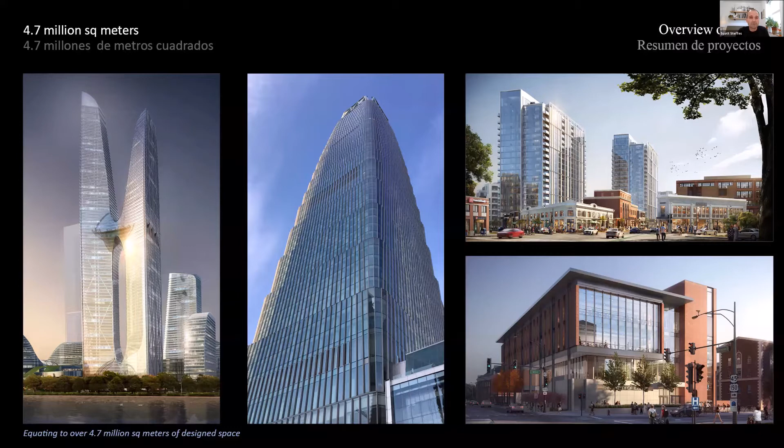And now today's presentation: Los bajos de los altos, the lowest of the highest. Today we're going to talk about the lowest of the highest. So what is the lowest of the highest? In regards to a building, it refers to the spaces typically at the base of the building that people and pedestrians occupy and view. One of the first things we can do when considering the design of the lower levels is to assess the ground plane.

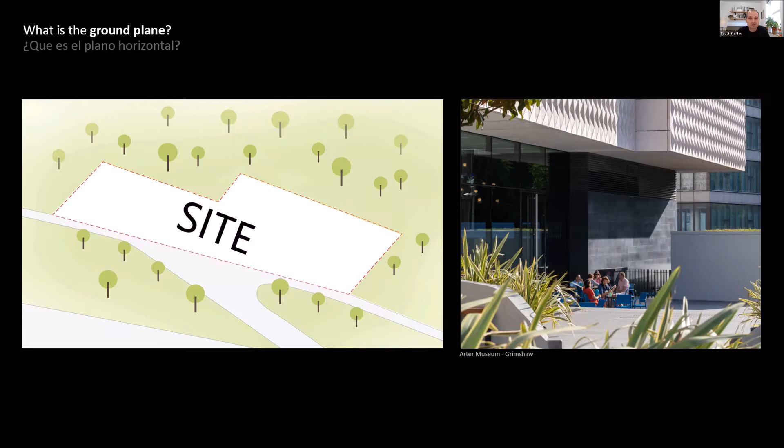So first, let's define the ground plane. The ground plane is considered the horizontal surface at the base of the project. This is sometimes referred to as site grade or the ground level. We will also include in this discussion how people view and interact with the spaces associated with the ground plane. This includes things like the shape of the building, the materials used, and the spaces created by that building.

Why is the ground plane important? Two reasons. Number one, the ground plane is where the majority of people will experience the building. It's where most people enter the building and the spaces that pedestrians walk next to.

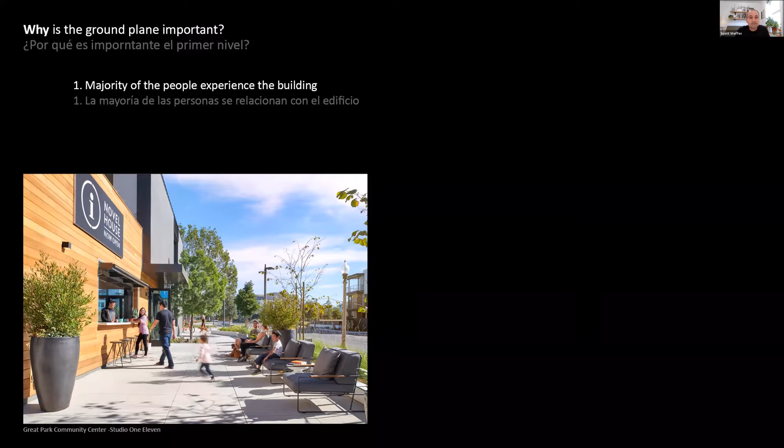Number two, the ground plane typically provides the quickest and easiest access for people, vehicles, and things. For this reason, the following programs are ideally located on the ground plane: entrance lobbies, drop-off and pickup, bars and restaurants, shopping and retail, parking, and deliveries, garbage, and building services. All of these things want to be at the base of the building, and they're all competing for that space.

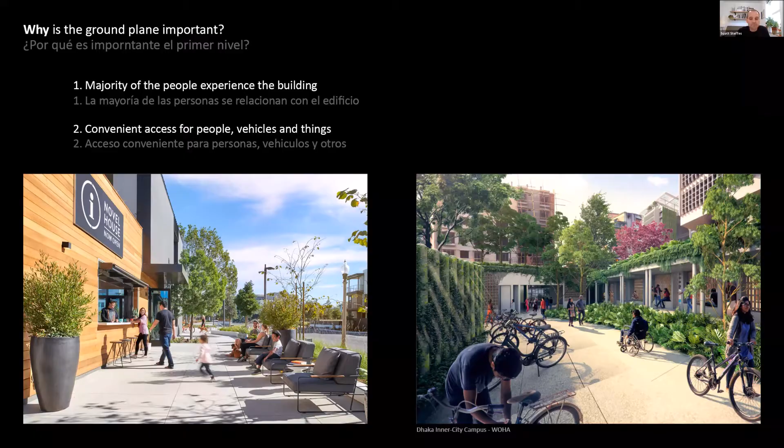So what do we need to think about when designing the ground plane? Here are 5 strategies that I've used: active, non-active, natural variation, simulated, and minimal.

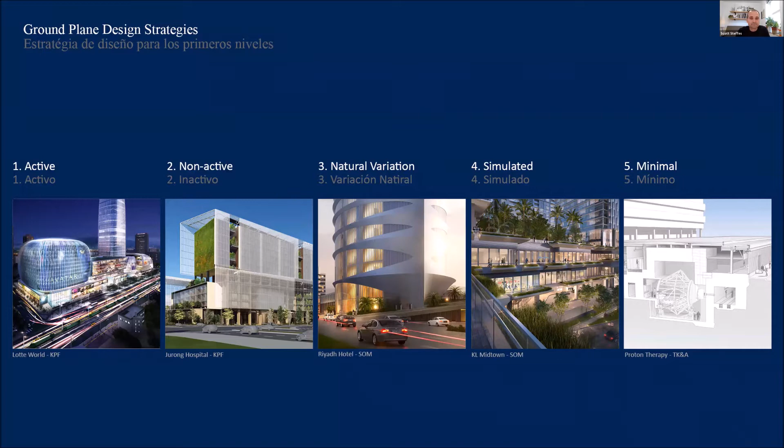We'll go through each of these in more detail now. In urban environments, active ground planes are often desirable as they provide convenience and comfort to the users. For an active ground plane to be successful, it should feel inviting to the pedestrian and allow for easy views and movement throughout.

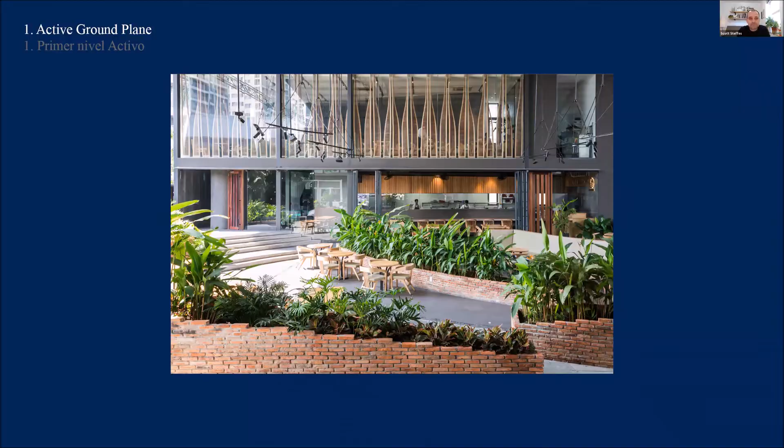So how do we make an active ground plane? Here are 5 techniques that I use. The first technique is rather obvious: if you can provide an active program that has a lot of active people, then you'll have an active ground plane. For example, programs like restaurants, bars, shopping, exercising, and performance spaces all create a more active ground plane, and should ideally be placed at the base of the building.

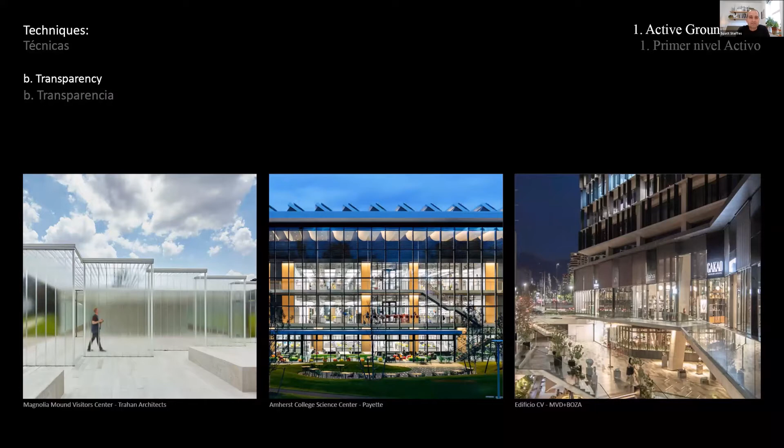The second active technique is transparency. This helps people see the active programs and also provides a sense of depth within your project.

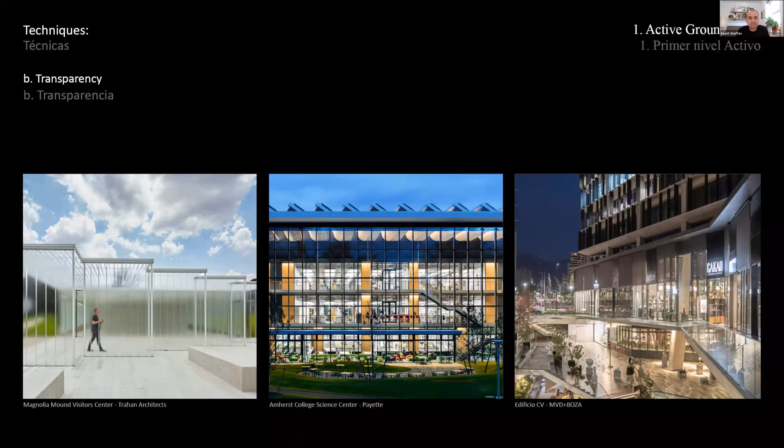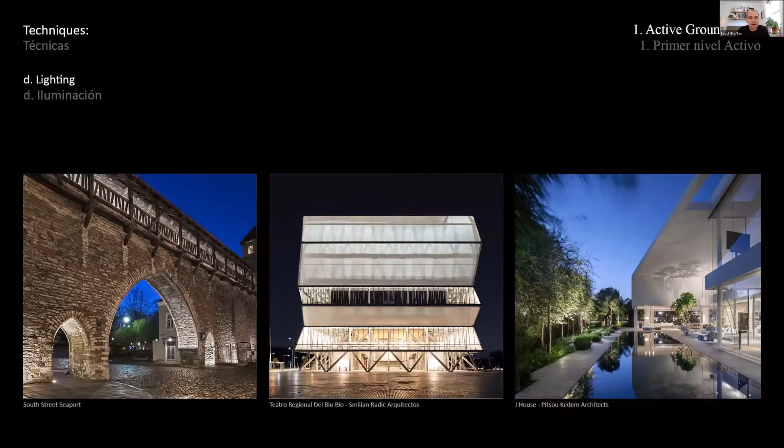The fourth technique to activate the ground plane is to utilize specialty lighting. Creative uses of light can be an easy and effective way to provide variation and manipulation of conditions, helping them feel more dramatic. A word of caution though: be thoughtful and minimal when possible with lighting, as too much light or color variation can be distracting.

The fifth technique is to utilize movement to create a sense of activity. Many things can create movement — they don't have to physically move, they can be stationary. The shape of the building itself could simulate movement.

Actual elements of the building can physically move — for example, operable shades or flickering pieces of metal. All these things can create a sense of motion. Utilizing nature can also create harmonious movement, such as the movement of trees and plants in the wind, and natural or man-made movement of water.

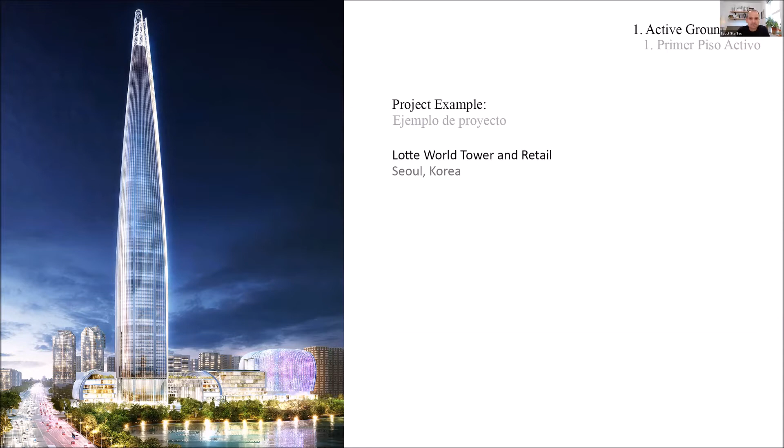Now I'm going to go through a project example that utilizes these techniques to provide an active ground plane. This is a project I worked on while at KPF. Our team had already won a competition to design an iconic 555-meter tower in this specific location. We then got asked to look at creating an active mall next to that tower, and I'll walk through how we approached the design process of that space.

To start, we looked at the ground plane. It was a flat site with an iconic tower already centrally located on the west side. The roads on the north and west were extremely busy with vehicle traffic — there were 8 lanes of traffic and thousands of people traveled on these roads each day. A large lake existed on the south side.

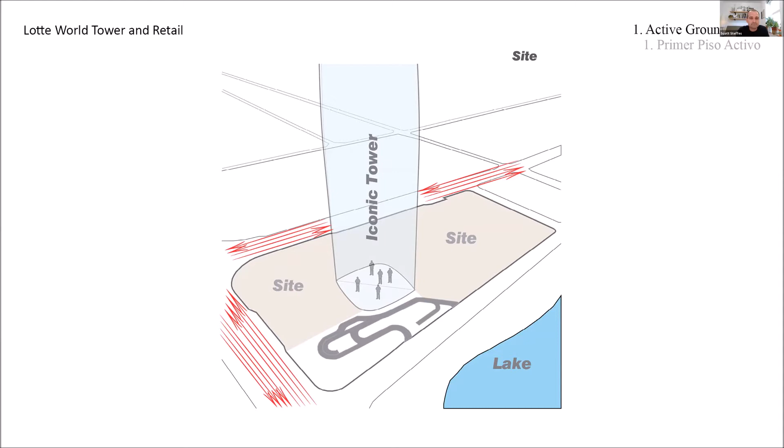Understanding that thousands of people would enter and exit the tower each day, we created a comfortable plaza that protected them from the busy traffic, by wrapping the tower with active program like restaurants, bars, and boutique shopping.

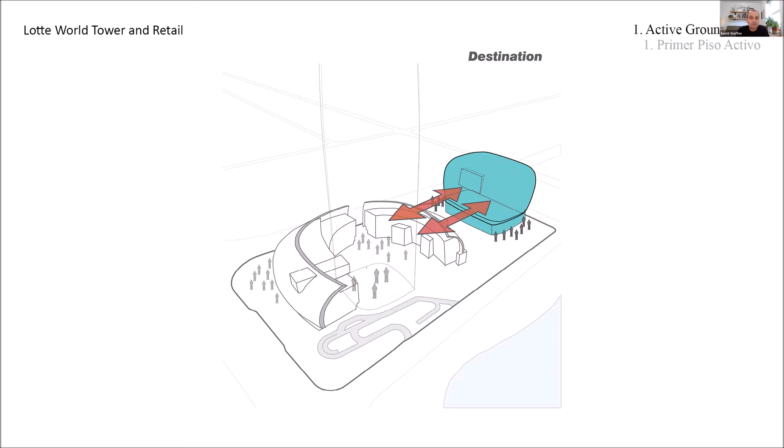Our client also wanted a large movie complex, so we utilized it as a destination opposite the tower on the far end of the site. We then infilled the space with traditional retail spaces that thrive on internal circulation. A lot of retail malls like this like to be internal, so we created functional paths through the building that would connect the two programs.

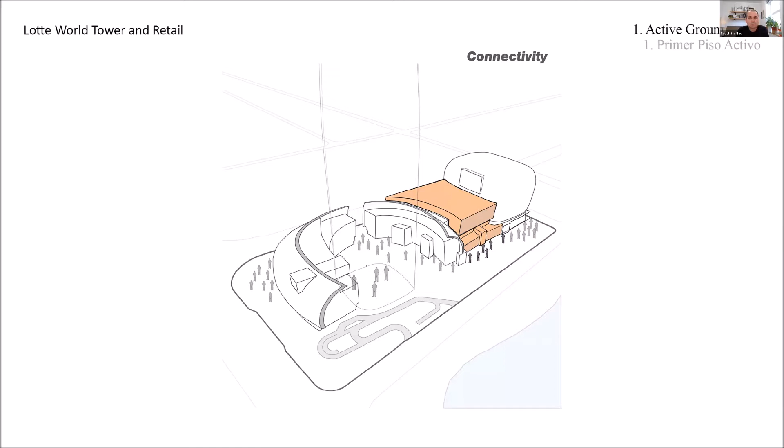I want to take a moment to look at some of the techniques and details that were developed based on these site conditions. Active programs like bars, restaurants, and specialty shopping created a dynamic space directly adjacent to the tower. We utilized transparent walls with shading devices to create depth within the building.

We provided large sculptures to help create a sense of scale. It was a big space with a tall tower next to it, so we put trees and other art that was large in its own right, but small relative to the other things, helping people feel more at scale. Lush trees and vegetation provided ample shade and natural movement throughout the plaza.

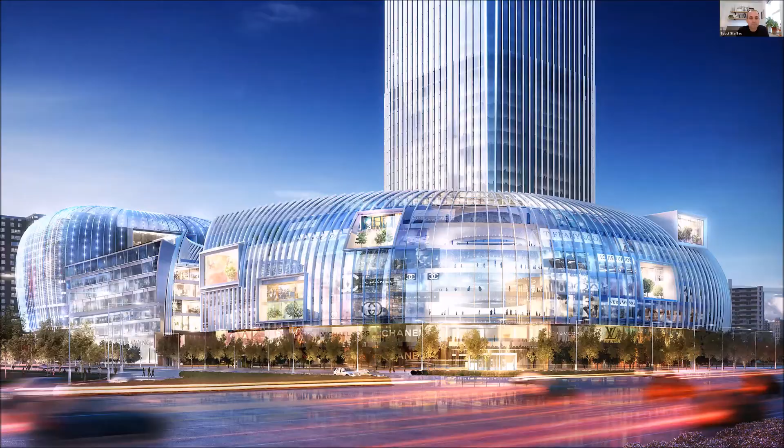Now, the north and the west sides of the building did not have as much pedestrian traffic. This project was in Seoul, Korea, and was accessed via a large train system directly to the tower. So most people would come to the site via the train and get out within the plaza. On the north side and the west side, there weren't many pedestrians, but there were a lot of cars.

So we increased the scale of architectural features to relate to the experience of the people in the vehicles instead of people on the sidewalks.

Large gathering spaces on the interior, like performance venues and circulation space, were strategically placed throughout the building. These active spaces were expressed on the exterior as transparent nodes.

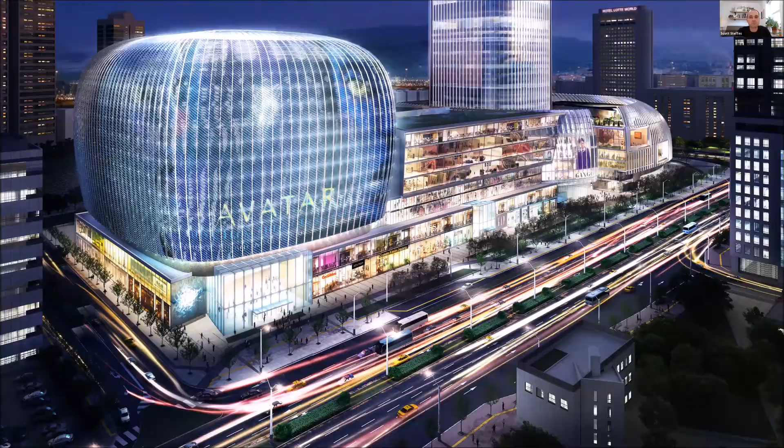Specialty lighting and screening elements were utilized to brand the building and to create a dynamic facade where other non-active facades would have been. For example, the theater space needed to have opaque exteriors.

Here we provided interactive lights that showcased the current movies. Therefore, it would change daily, throughout the day sometimes. Other retail locations incorporated signage and branding to indicate the program.

Transparent glass was once again used at entrances and gathering spaces to indicate communal spaces.

And now Javier will summarize in Spanish what the active ground plane method is. Yeah, thanks, Scott.

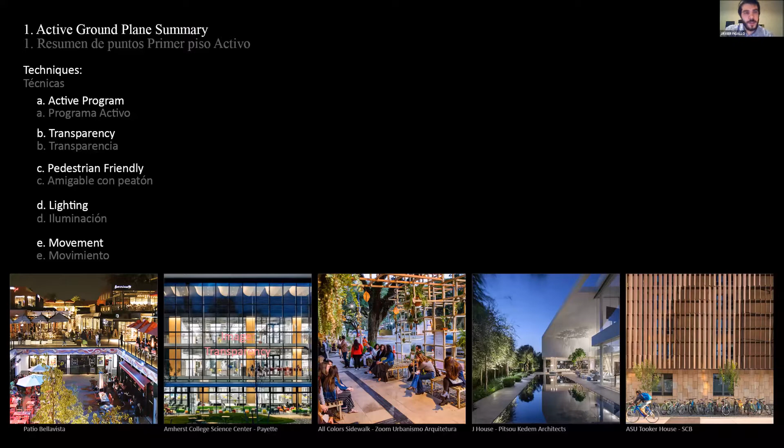End of intervention. Now you can continue, Scott. Okay, thanks, Javier.

Now we'll talk about the second ground plane method that I like to use for addressing the ground plane. This is the non-active ground plane, characterized by opaque, nondescript walls, visually unappealing spaces, and programs that do not facilitate active use by people.

In an urban environment, this is usually a bad thing and should be avoided because they can make spaces feel uncomfortable, intimidating, or undesirable. In non-urban spaces, these can be used quite effectively, and can also be effectively used in urban spaces, but in general, we like to have active spaces.

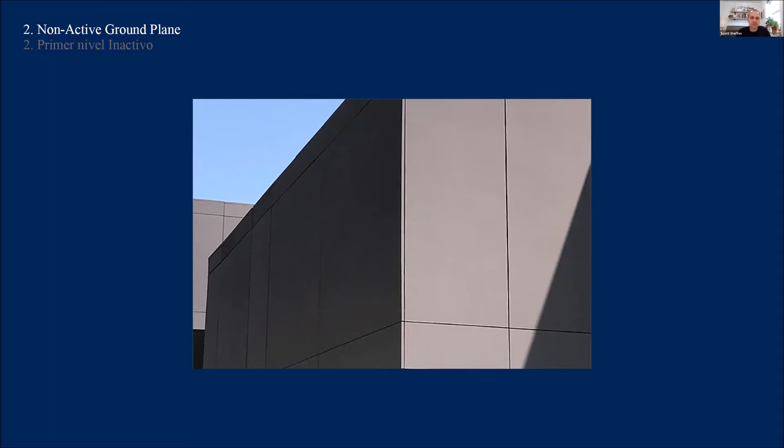So if non-active spaces are not desired, why do they occur? There are many reasons why spaces become non-active. Let's look at some common causes, and then we'll discuss some ways to address them.

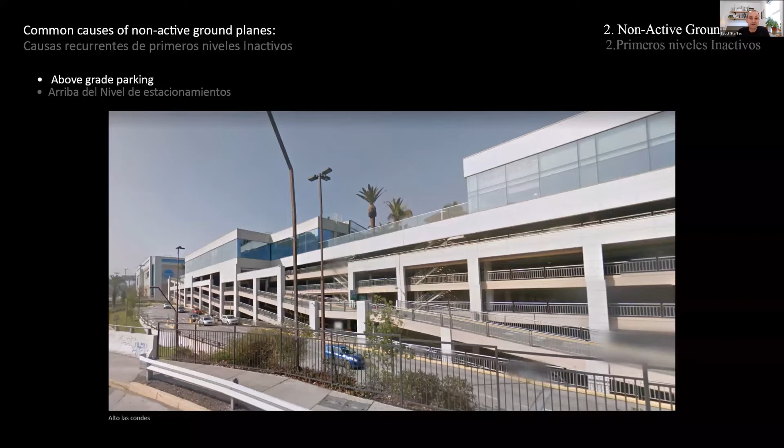One common cause of non-active ground planes is above-grade parking. These spaces do not typically have a lot of pedestrian interaction, and common building materials for parking garages are not always visually appealing.

Some programs desire to have opaque walls for either visual and/or acoustic privacy. For example, some government buildings, hospitals, retail, manufacturing, storage, and other service spaces require non-transparent walls.

Mechanical systems may require large air louvers. Service and trash areas might be unsightly, and some jurisdictions require large electrical rooms at grade level.

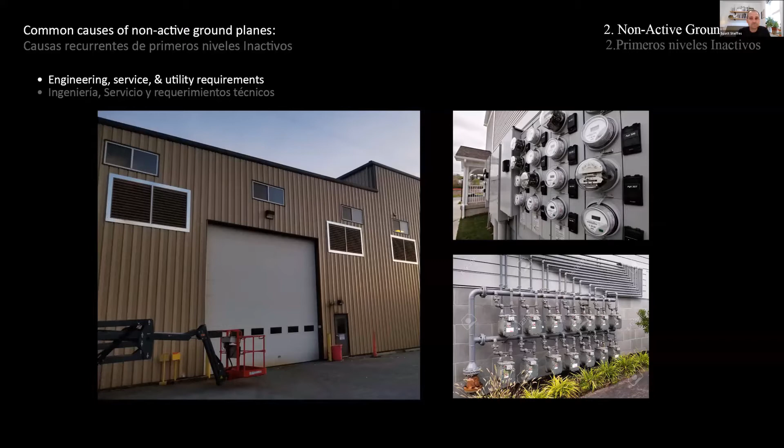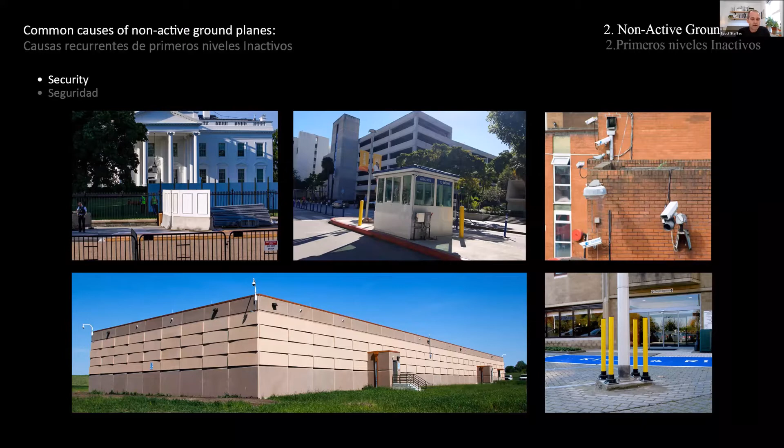Security requirements may also require blast-resistant materials or other mechanisms that are not always the most appealing. And lack of shade, seating, or amenities can make spaces uncomfortable for people to be in.

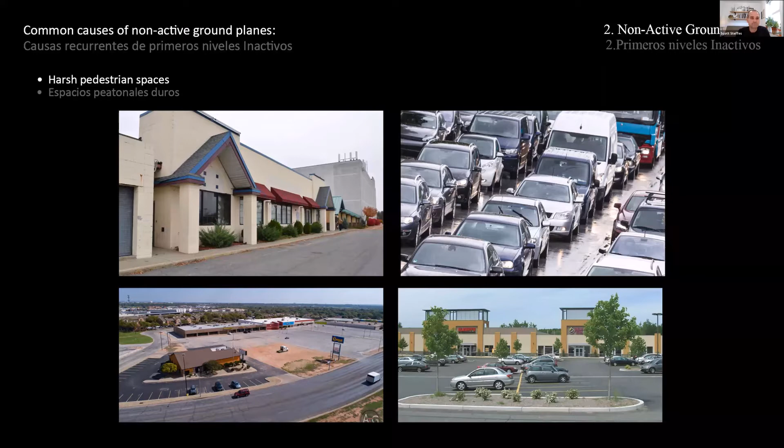So those are the common reasons why non-active ground planes happen. Now let's talk about some techniques to improve those non-active ground planes.

The first technique is rather obvious: if you can move the non-active program and replace it with more active program, then do it. That's always a good thing. For example, can parking be moved to another location on the site or placed below grade? Can a utility room be placed on an upper level or a lower level? Can a louver be installed in the roof or in a soffit instead of a wall? If so, do it.

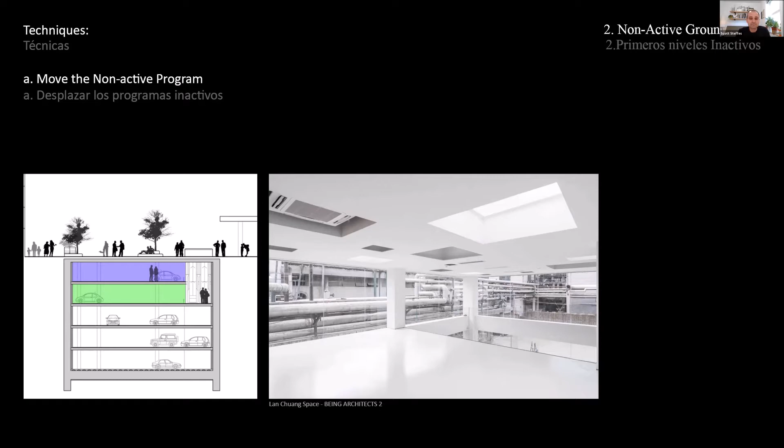If the non-active program cannot be moved, then try to wrap it with an active program. For example, can you move the program inboard on site and provide active programs like cafes or public circulation at the perimeter? This is often done in large malls where they have a large requirement for parking. If you can move the parking to the middle of a site and wrap the site with retail like restaurants and boutique shopping, then that would be effective.

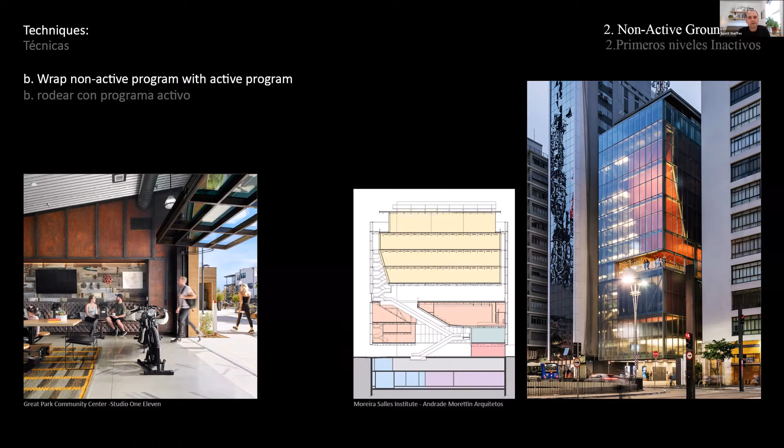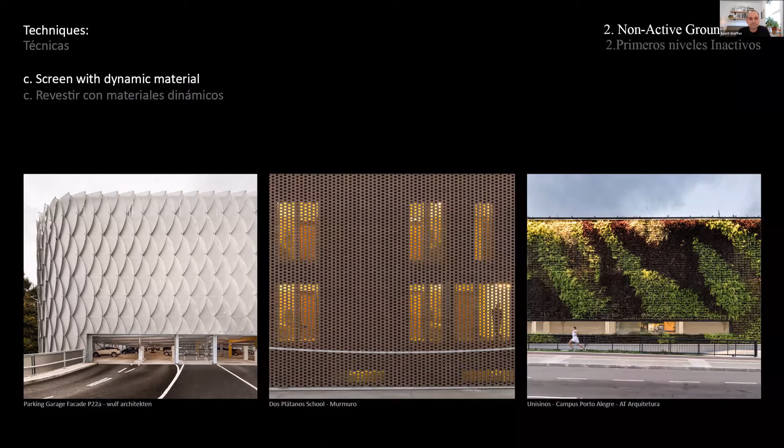The next technique is to use light, transparency, or graphics to manipulate the condition. Subtle uses of these elements can create intrigue and a sense of depth. In retail, facades are strategically branded to portray internal experiences. It's quite common in retail function.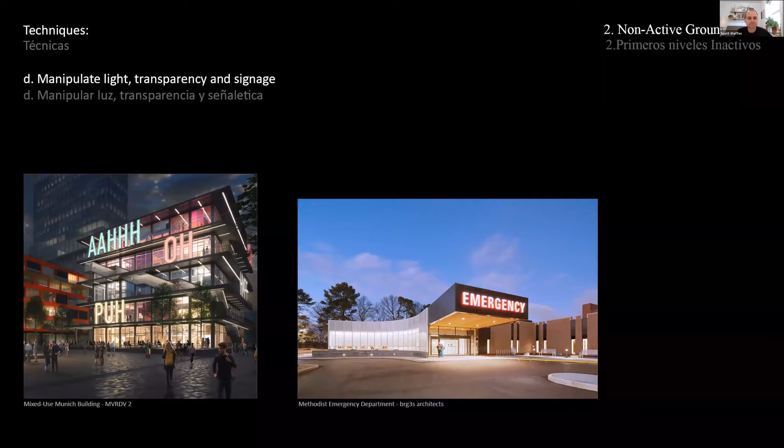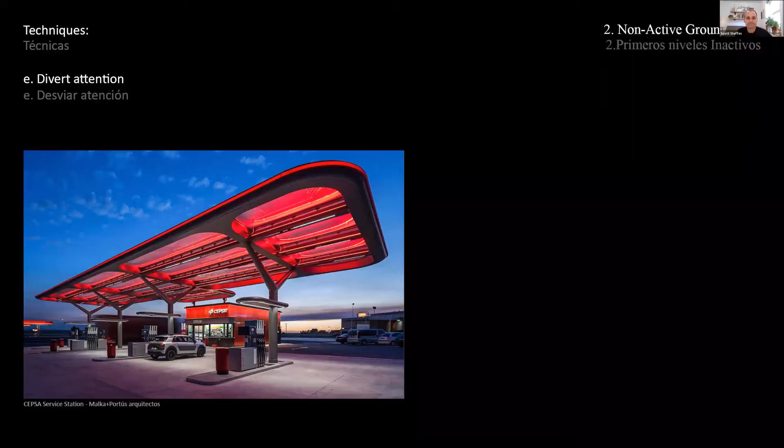Now I'll show you a project example utilizing these techniques. This is a project that I once again worked on at KPF, and is for a new medical hospital in Singapore.

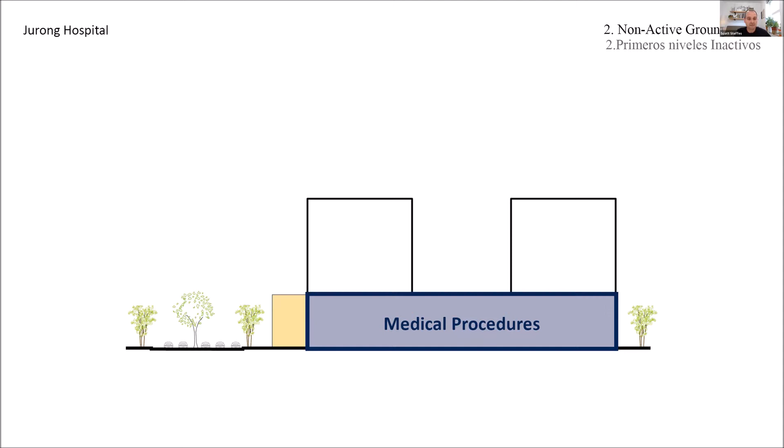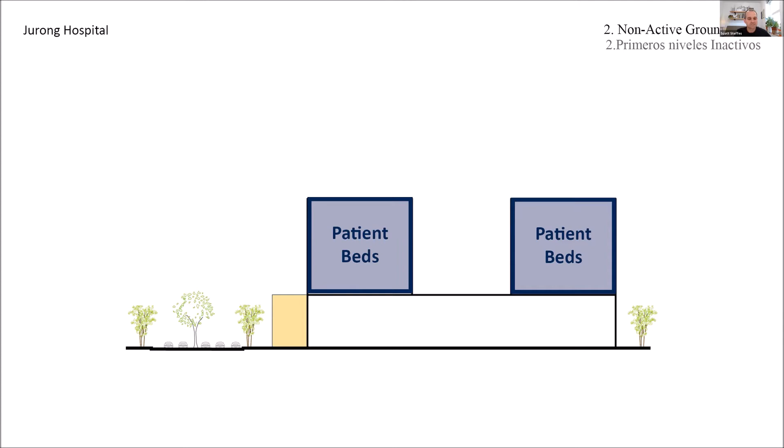First, I'll show you our design process for assessing the ground plane conditions. This is a section diagram of a traditional medical hospital. It typically consists of several non-active floors at the ground plane for things like medical surgery, labs, and other procedures. It also includes small waiting spaces for patients, and multiple floors above filled with beds where the patients recover. Sometimes they're there for a day, sometimes a couple days or a couple weeks.

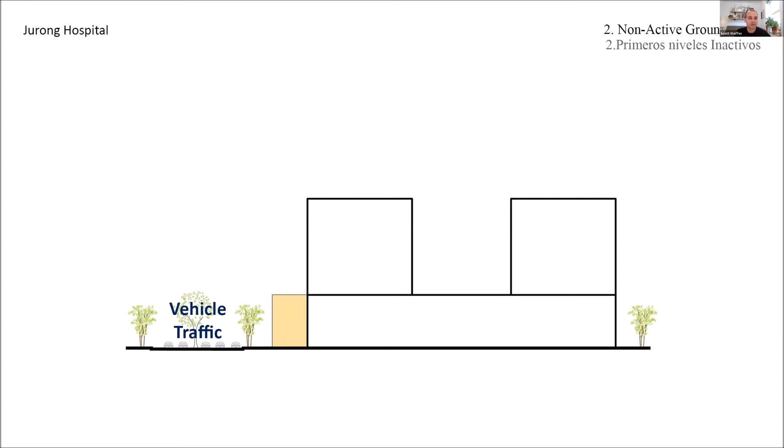And for this project, we also had a requirement to design a large amount of vehicle traffic. So as you can see, large portions of the project were non-active and not particularly friendly to the patient experience.

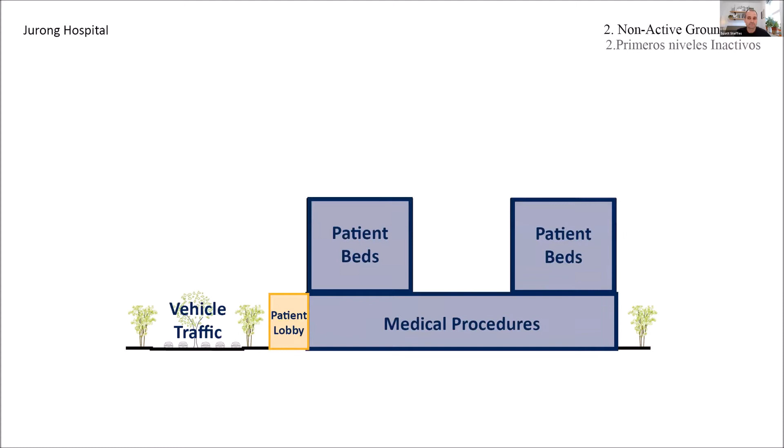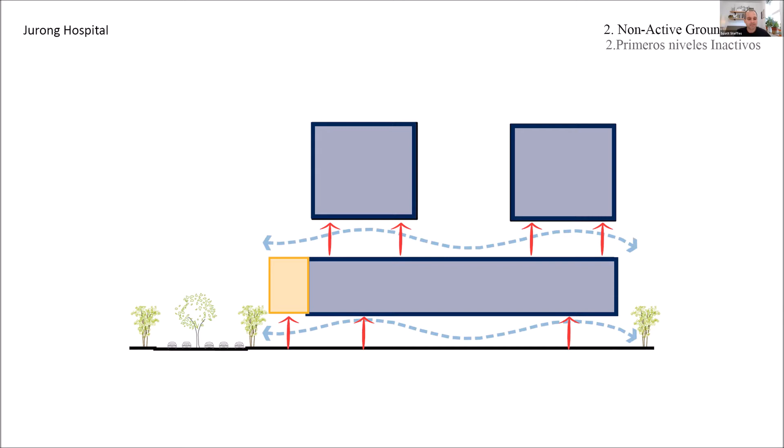To address this, we decided to raise the non-active elements up off the ground and provide more space on the ground level for active functions. This helped us create space so that we could move the vehicle traffic away from the lobbies and replace it with a large park that could be seen and used by the patients.

This also allowed for taller waiting areas, and there was some shaded space under the building for recreation and relaxation by both the patients and also the general public in the neighborhood.

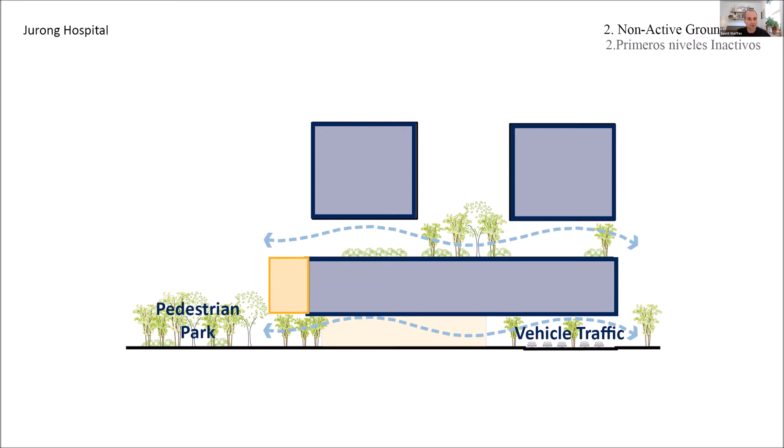We then covered the non-active portions of the building with a metal screen that offered protection from the harsh sun that is common in Singapore, and it helped to create a dynamic facade across the whole building.

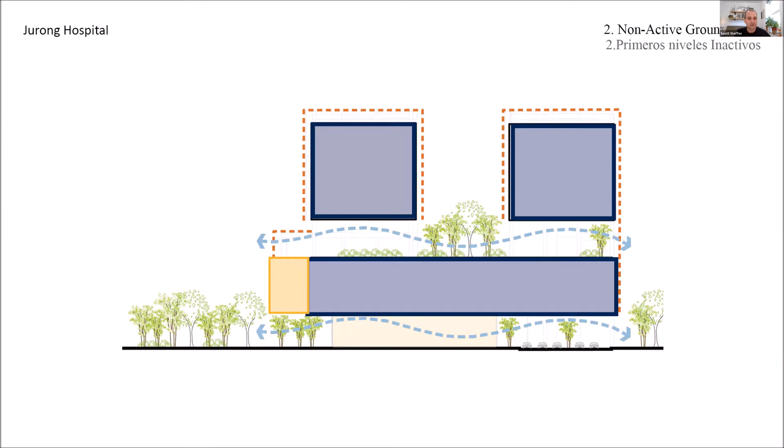Here is an image of the entrance that we created under the elevated mass, and an image of a light and airy reception area at the ground level.

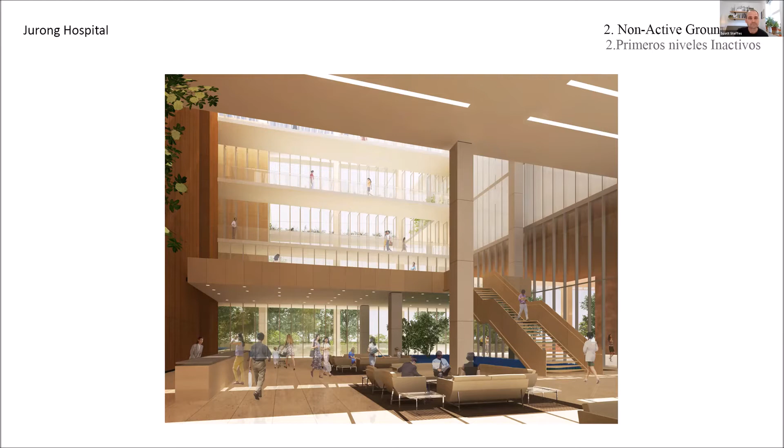Gracious open stairs lead you to the upper levels of the hospital, and a series of external waiting areas are set in garden-like settings throughout the project.

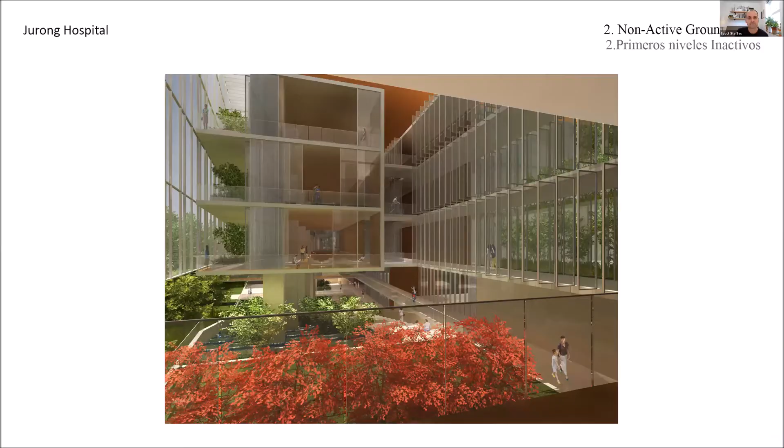And now Javier will summarize in Spanish the non-active ground plane method.

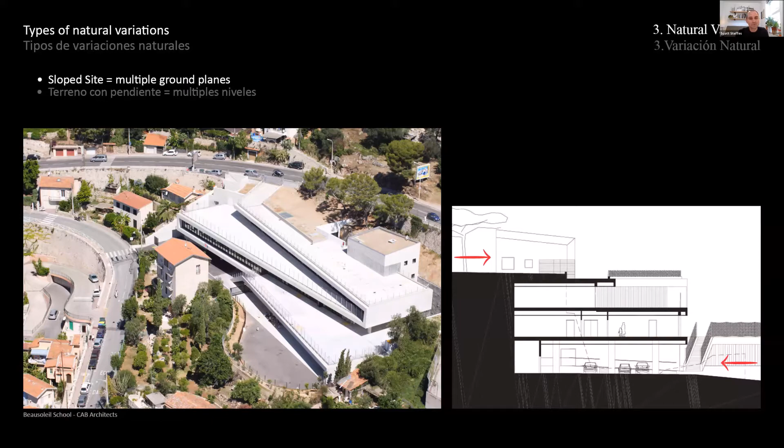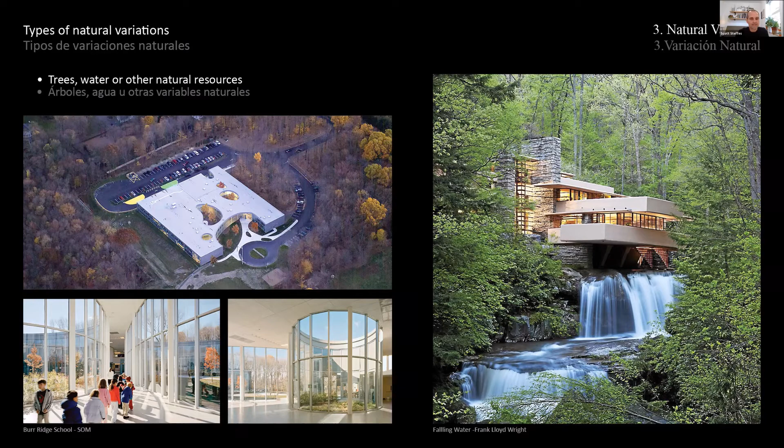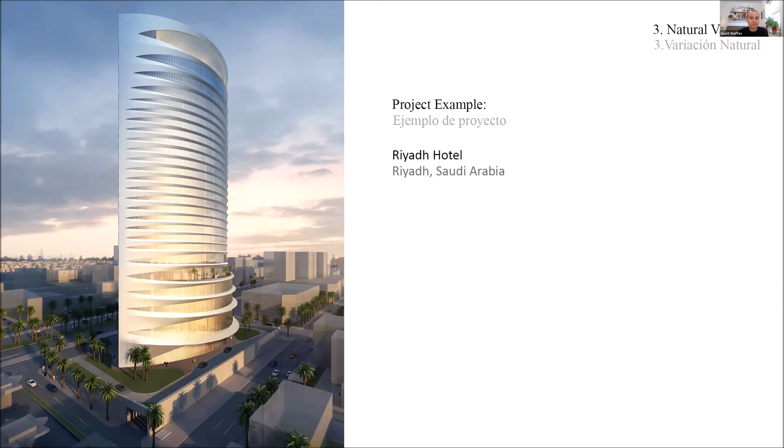Now I'll show you a project example that utilizes a natural site variation. This is a project I worked on at SOM on a high-end hotel in Riyadh, Saudi Arabia.

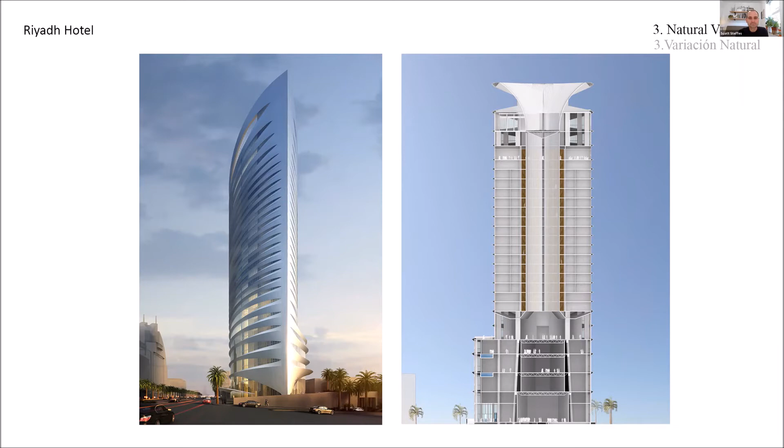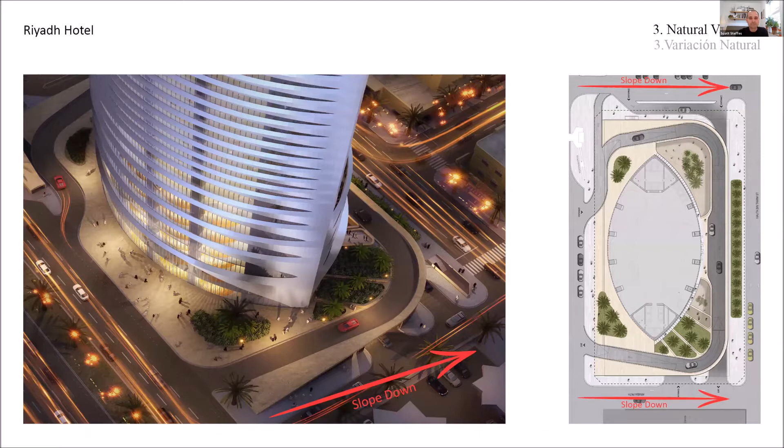The program consisted of a luxury boutique hotel, exclusive spa, and a large ballroom facility. The site was very small and naturally sloped down approximately 3 meters on the back side of the project. The program called for a 300-person high-end hotel lobby and an 800-person ballroom.

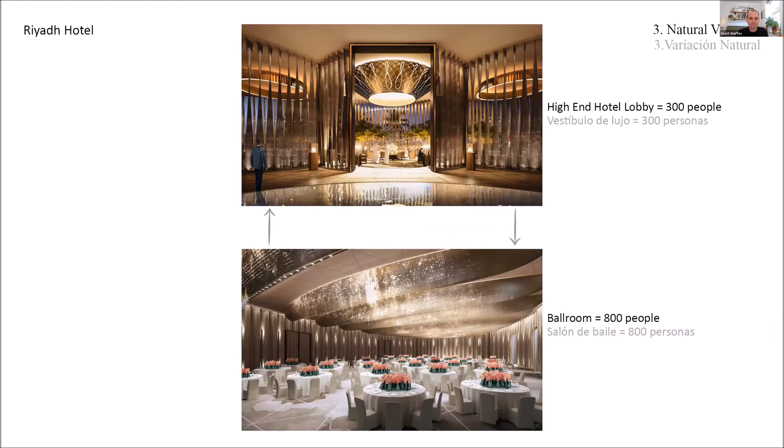Due to the small site, there was not sufficient space for both drop-offs to be on the same ground plane. So we stacked the programs, one on top of the other. Utilizing the natural site grade, we gave each program its own drop-off. A person would drive down to access the ballroom, and they would drive up to access the hotel.

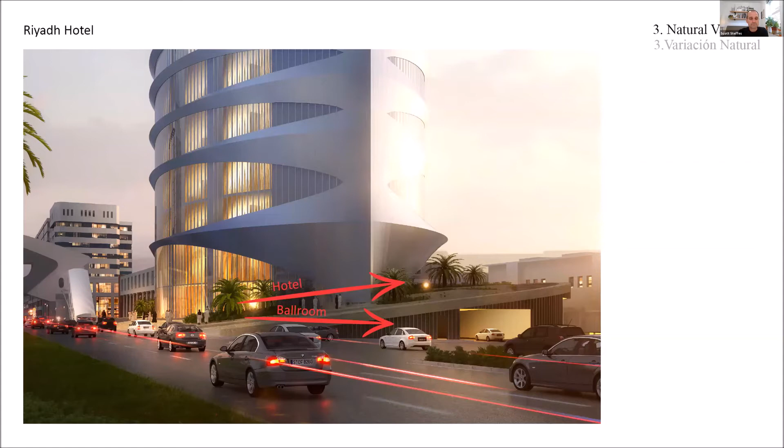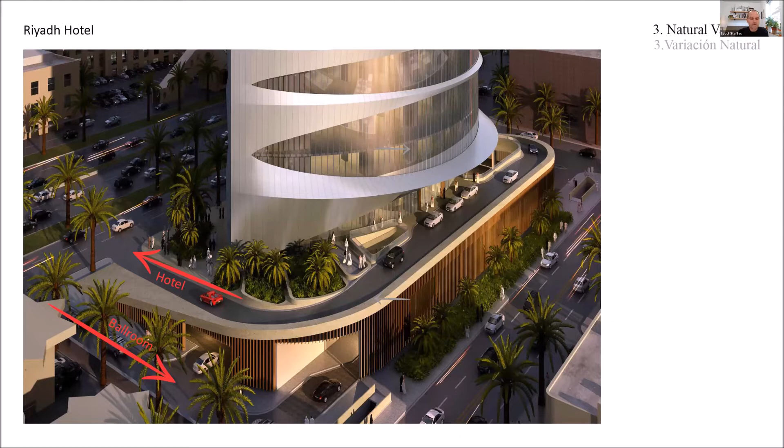Here's an image of the stacked drop-offs utilizing both ground planes. We were also able to introduce a service entrance on the side of the building so that garbage trucks and deliveries could be made easily without impeding any other traffic with the ballroom drop-off and with the hotel drop-off.

And now Javier will summarize in Spanish the types of natural variation we can use to optimize the ground plane.

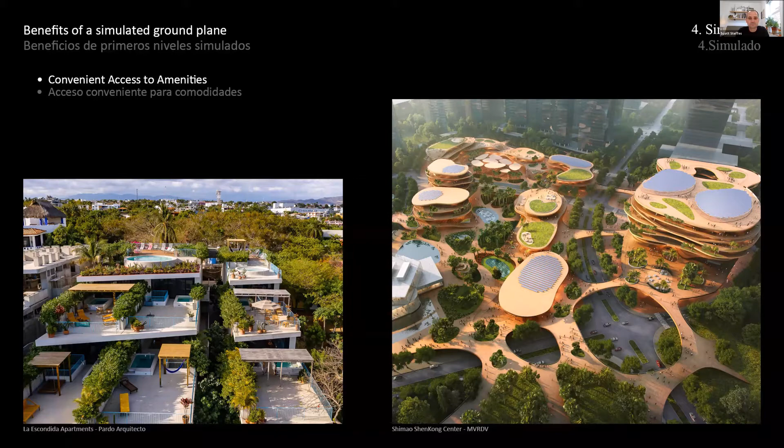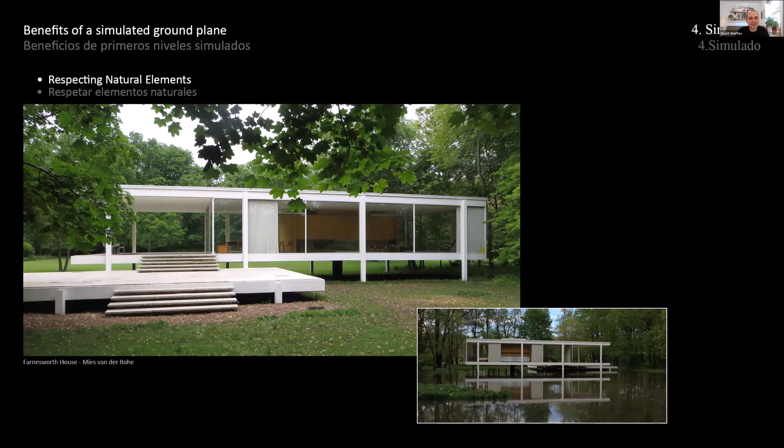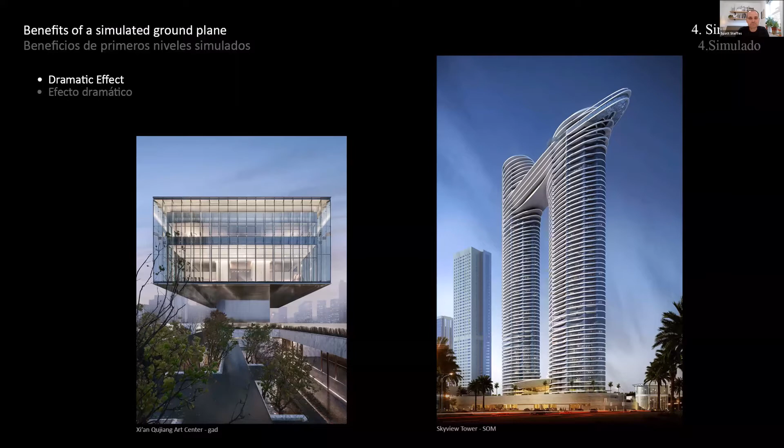The last benefit: setting a building above typical grade can create a sense of grandeur due to the separation from the common pedestrian circulation. Be careful though, as this can have negative perception as well, as sometimes seen with government buildings. Be sure the spaces are gracious and welcoming to pedestrians, even though it may not be on a typical pedestrian path.

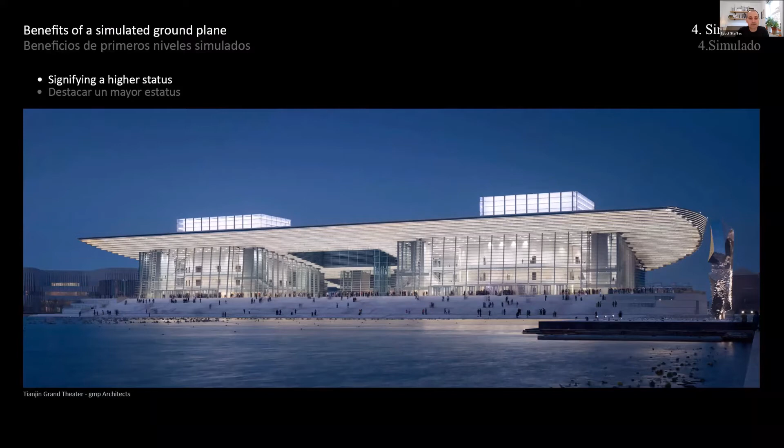Now I'll show you a project example utilizing these techniques of simulated ground planes. This is a project I worked on at SOM for a large multi-use development in Kuala Lumpur, Malaysia.

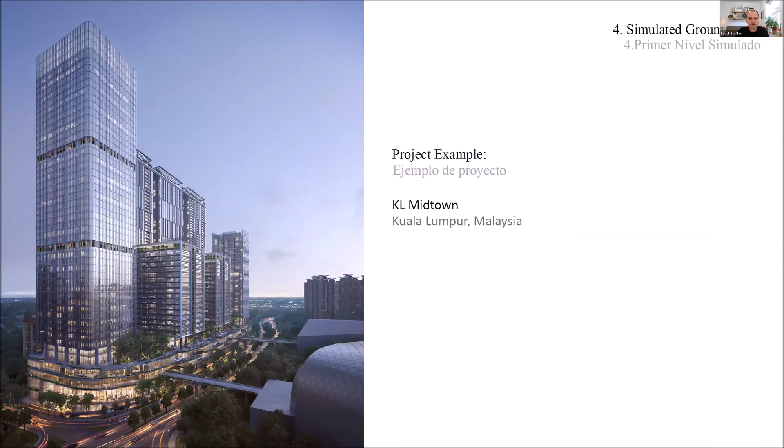The project is called KL Midtown and is 680,000 square meters, located in a new dense development outside the city center. The program consisted of a large office tower, 3 large residential towers, a hotel, a large retail mall, and extensive amounts of above and below grade parking.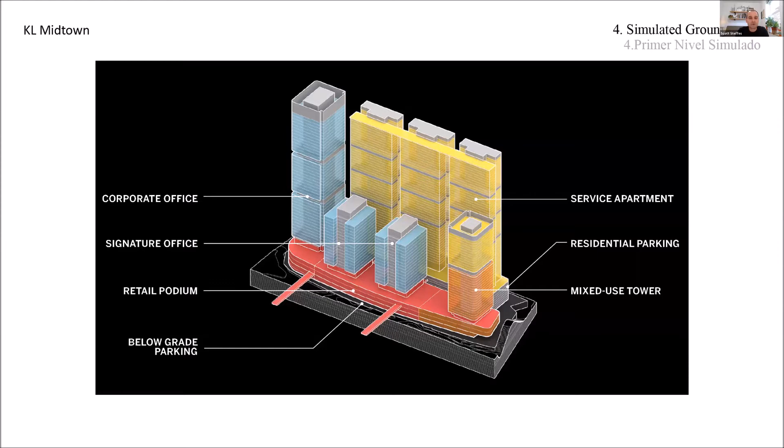The project has a clear view to the urban center of Kuala Lumpur, but is situated in an environment with lush vegetation, as most of Malaysia is. For this reason, we decided to integrate as much vegetation into the project as possible via simulated ground planes strategically located adjacent to common gathering spaces throughout the entire project.

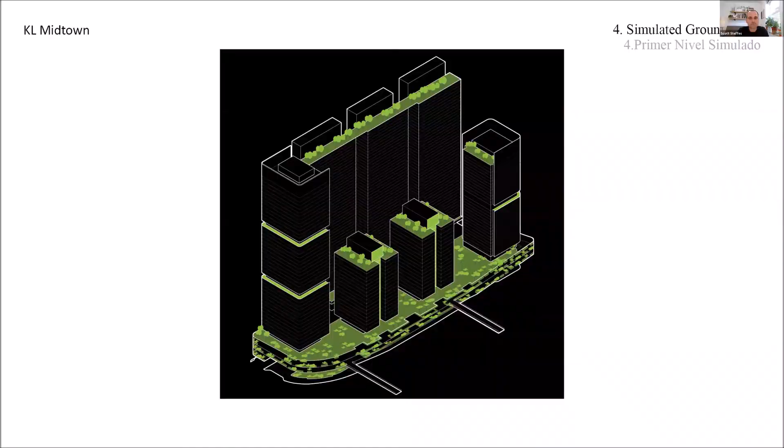For example, exterior retail pedestrian ways and streets were simulated at every level with ample shaded seating areas and vegetation. And a large rooftop plaza was created for the residential units.

Exterior balconies were provided as sky lobbies to the office tower.

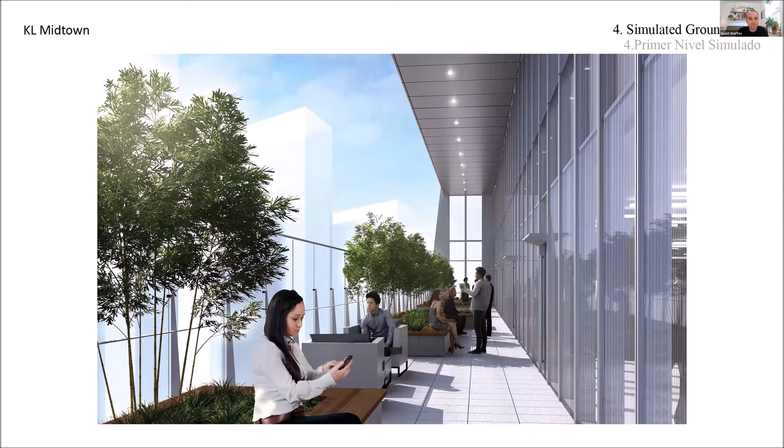Abundant natural light, vegetation, and transparency were used to blur the separation of interior and exterior spaces in Kuala Lumpur. This is a quite common technique there, but can be used many other places. You don't always know if you're inside or outside in these spaces, as they use a lot of natural ventilation, transparency, and vegetation throughout interior and exterior spaces.

And now, Javier, can you summarize for us the simulated ground plane method? Yeah, sure. This is a large-scale project, no? It's rather large, yes. Ya.

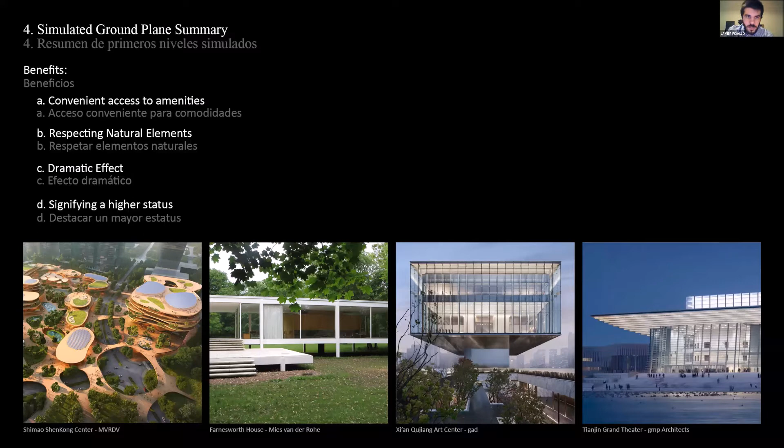So, you can continue now. Okay, thanks.

Again, the first technique is rather obvious: the smaller the building footprint, the less impact there will be to the site. So more space can be provided to pedestrians, nature, and other elements.

One of the most iconic minimal projects is the Apple Store in New York City. Here, a highly detailed glass box is the only intervention into the existing plaza, while a large, complex retail store was added below grade.

Adjusting the building footprint can reduce impact to pedestrian flow and create outdoor spaces that otherwise would not have been possible.

This technique was notably utilized by Norman Foster when he designed the HSBC Tower to be elevated off the ground plane to allow for free flow of pedestrians into the busy city center of Hong Kong.

Each week, hundreds of people gather in the opening space to share Sunday afternoon picnics with friends and family. If this building hadn't been raised, thousands of people would have been forced to walk around the block to get to the location that they normally would have gone to.

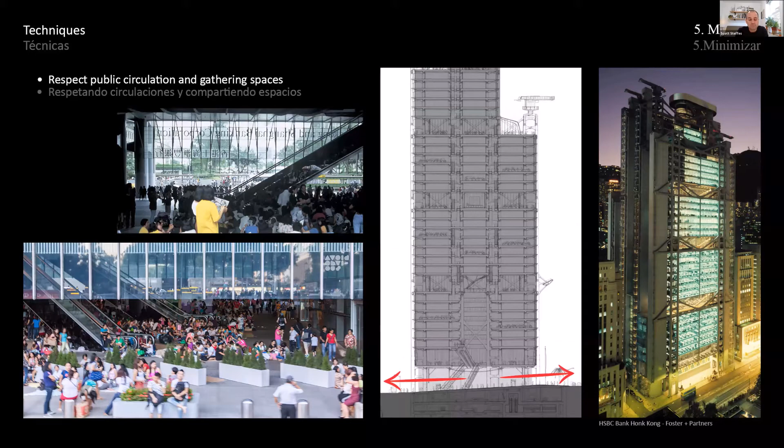And so he offered this as a service and lifted the entire building up, allowing people to walk under it. In addition, they can utilize the space for gathering, which they quite often do on Sunday afternoons.

The final technique for minimizing site impact is to understand and work within the existing scale, form, and materials of the adjacent sites. This can help to develop a holistic and comfortable environment.

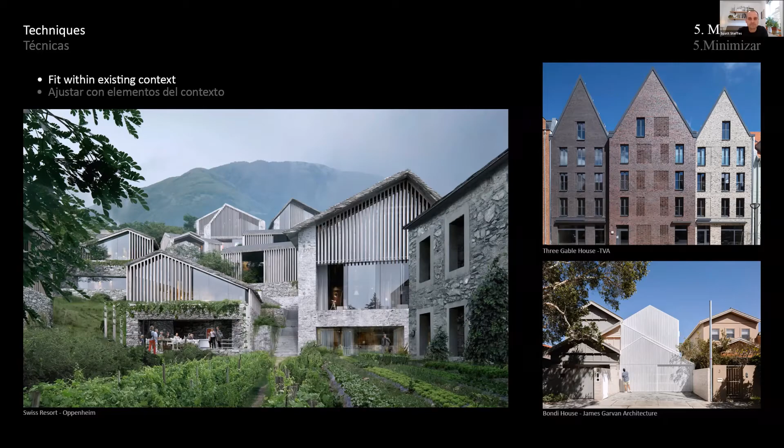For the last project example, I'll showcase a project I worked on while at Choi Kobus and Associates in Philadelphia for the University of Pennsylvania Health System. It's for a cancer treatment facility and is located next to a large medical complex designed by Rafael Viñoly Architects.

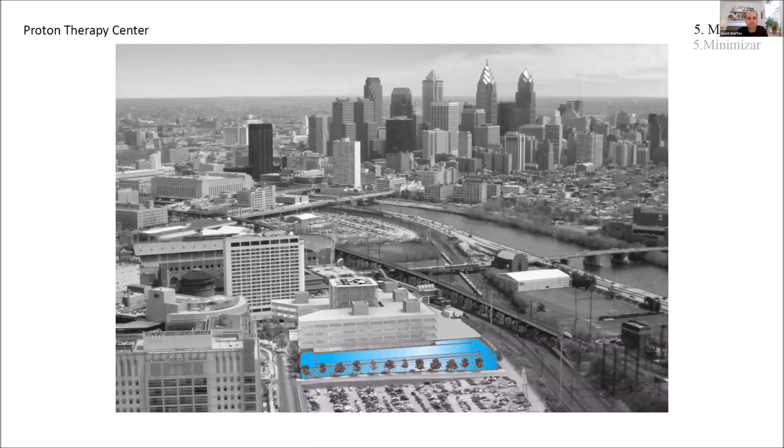This type of specialized cancer treatment utilizes charged proton atoms to deliver highly accurate radiation. The machine that charges the protons, though, is quite large. It's 10 meters in height and rotates around the patient.

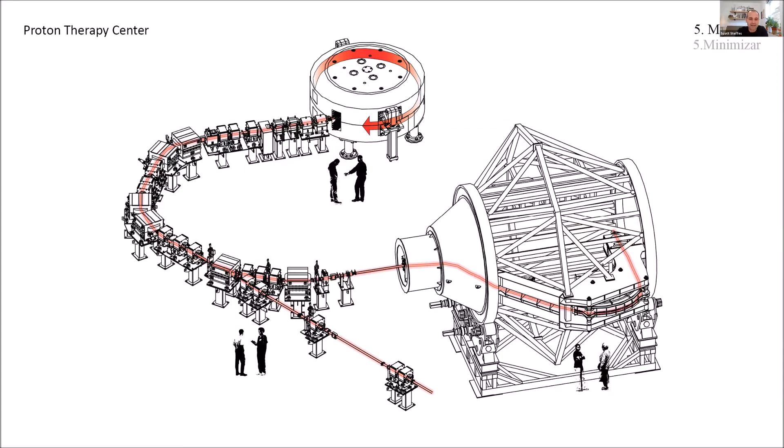The space requirement for the machine, including the concrete enclosures and roof, is about 17 meters tall. This would have blocked the windows of the adjacent hospital and created a large non-active wall directly adjacent to the sidewalk for pedestrians to walk next to.

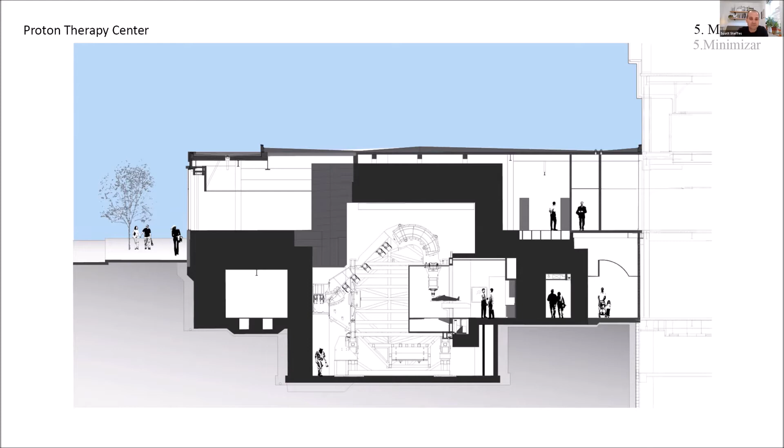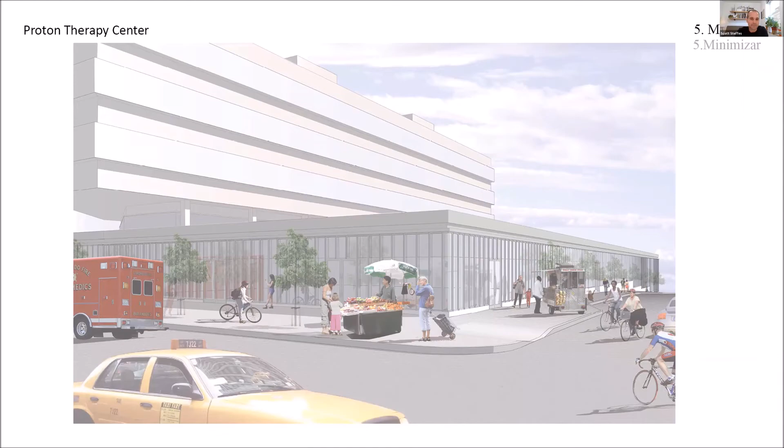So we decided to lower the treatment rooms below grade and only expose the top portion, which contained offices and patient spaces, and wanted to be transparent. The result was a minimal, transparent facade that was only about 6 meters above grade. Here's an image that shows the minimal impact to the site and adjacent building while providing extensive services below grade.

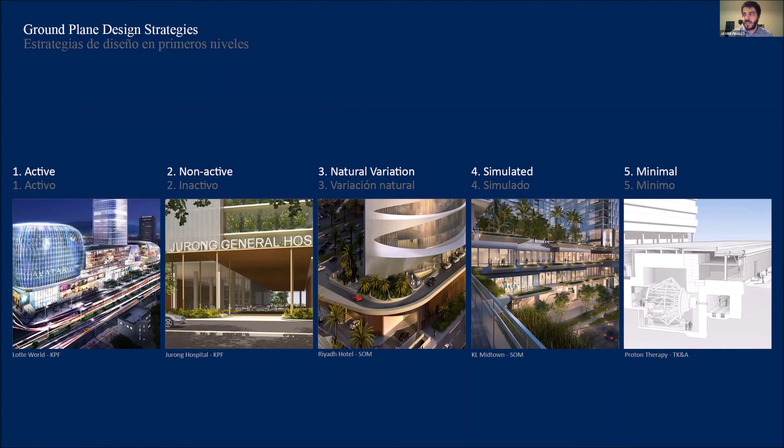And that's why we decided this semester to work in those areas, trying to bring some of these ideas and concepts or strategies to that part, being rational, being, I don't know, sensible with the area. That's my point. So if you could share your thoughts about that, it would be awesome.